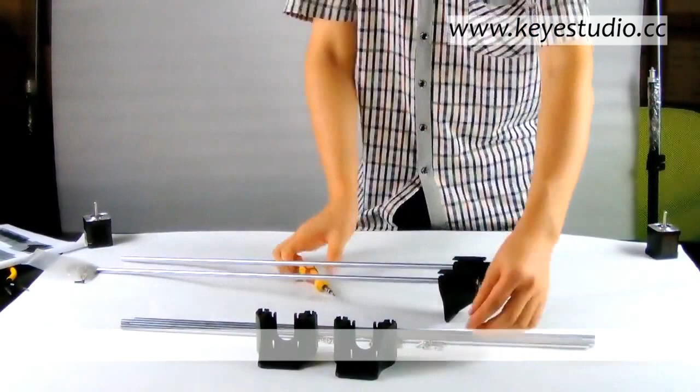Install slider and softly strike the slider into bracket holder with a small hammer. Then screw it down with M3*14 screw. Please mind the pressure you apply, otherwise the bracket holder may be broken due to over-exertion. The direction must not be taken conversely.

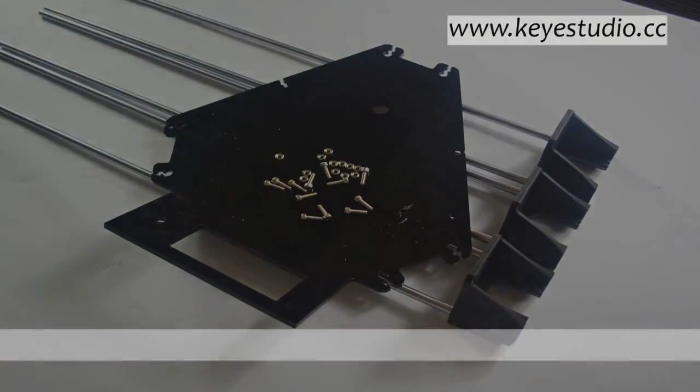The slider and the bottom of the bracket holder must be in one line. Install the bottom fixed plate of the frame and screw it down with screws. Please pay extra attention to the direction of the bottom fixed plate of the frame.

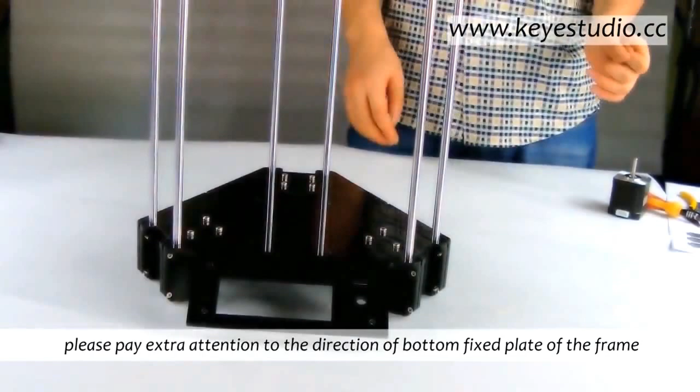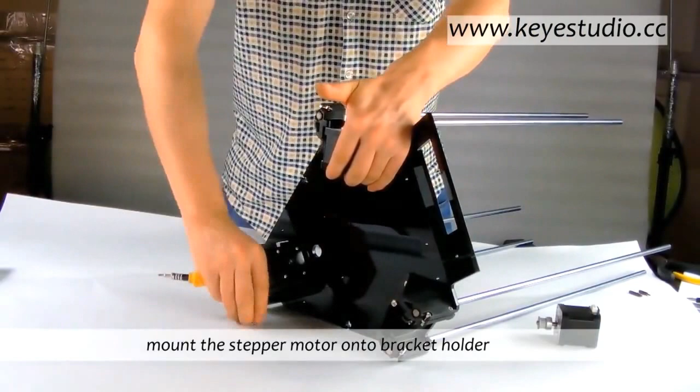Install synchronous wheel. Don't screw it down too tight because it will be readjusted during belt installation later. Mount the stepper motor onto the bracket holder. Please pay extra attention to the direction of motor connection ports for easy connection.

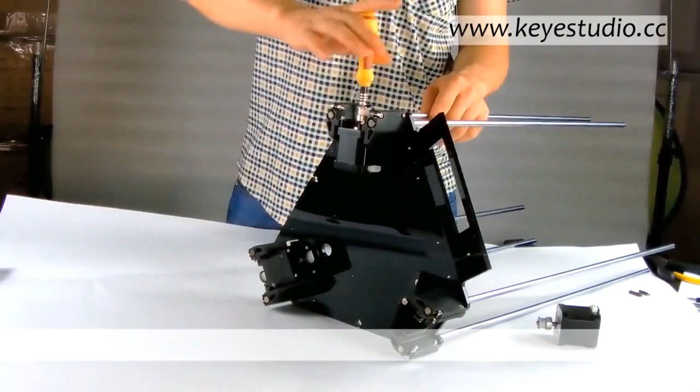Install self-lubricating copper bush and softly strike it into the slider. The side with chamfer should face down. Install belt clip and copper pillar, then screw down with M3*30 and M3*25 screws. Please pay extra attention to the direction of the belt clip during installation.

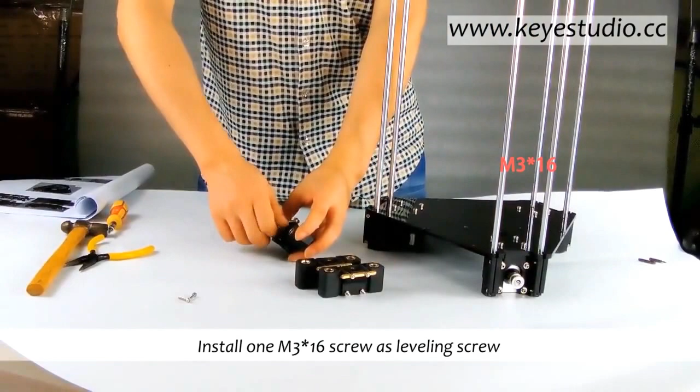Install one M3*16 screw as the leveling screw. Let the side with the leveling screw face up and put the slider into it. The side with the belt clip faces the outside of the frame.

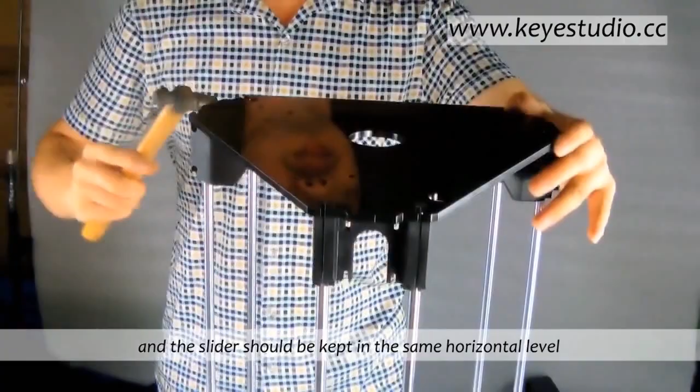Install bracket holder onto the slider. Install the top bracket fixed plate onto the bracket holder. The top bracket fixed plate and the slider should be kept in the same horizontal level. Respectively screw down with M4*14 and M3*14 screws.

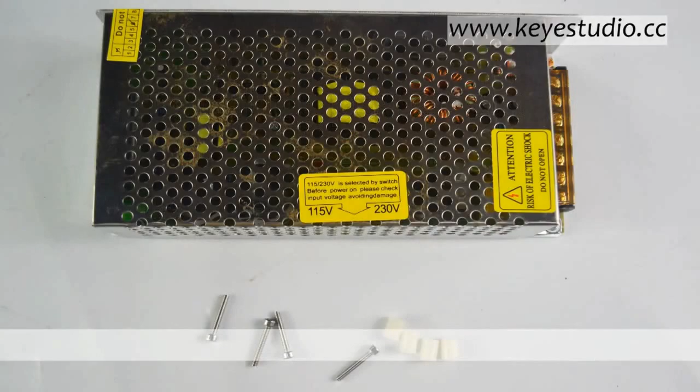Install the power supply onto the top bracket fixed plate and screw it down.

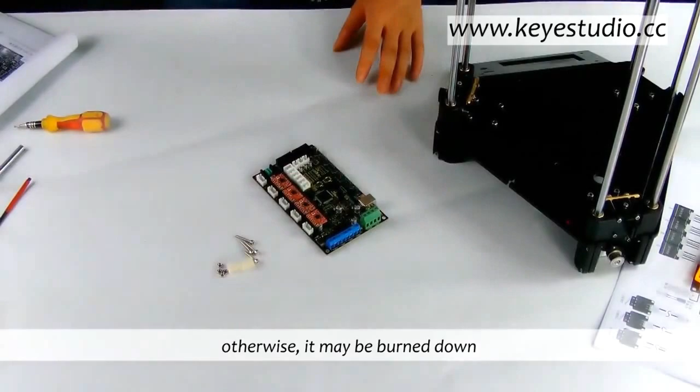Install 4988 drive board onto the 3D V1.2 main control board. Please make sure the 4988 drive is installed in the correct direction, otherwise it may be burnt down.

Install the main board onto the bottom bracket fixed plate. Add a plastic column between the 3D V1.2 board and the bottom bracket fixed plate, then screw it down.

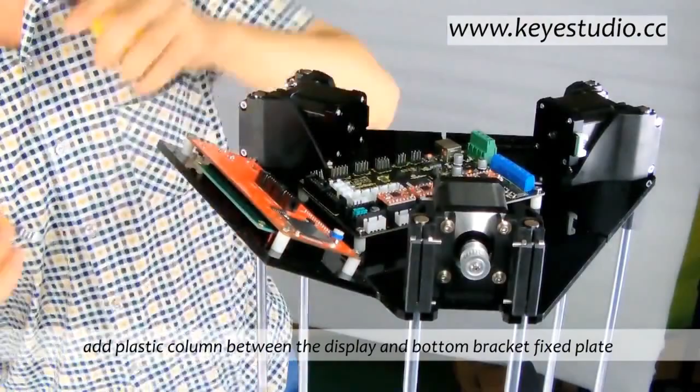Install the display. Add a plastic column between the display and the bottom bracket fixed plate, then screw it down.

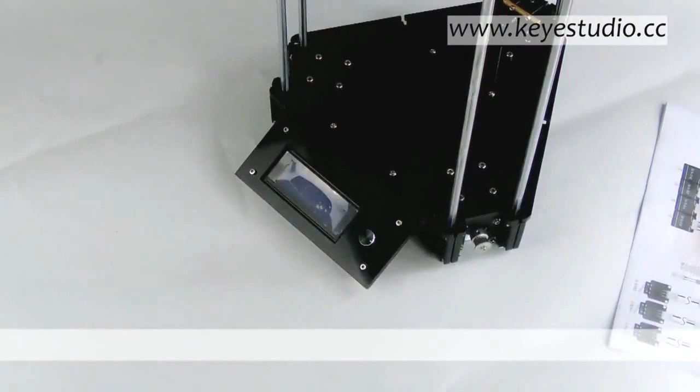Screw the 45 mm copper pillar down with an M3/8 screw.

Install the nozzle onto the movable platform. Let the heating wire and temperature-sensitive wire pass through the movable platform.

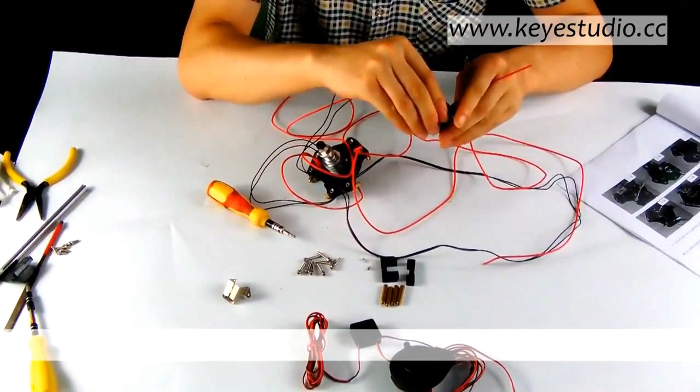Fix the nozzle and air deflecting block of the air blower, then screw it down with an M3/16 screw. Please note that the air deflecting block of the air blower should not be connected with the heating aluminum block of the nozzle.

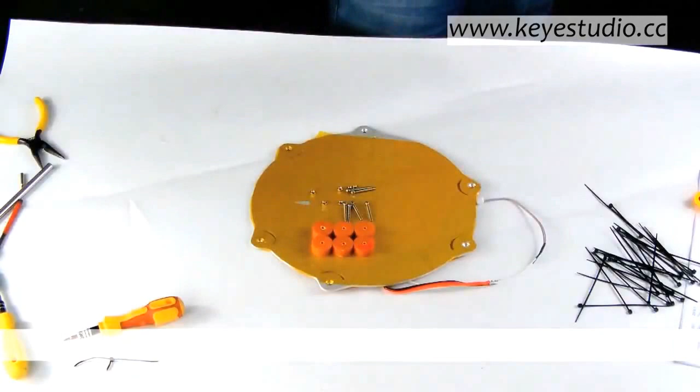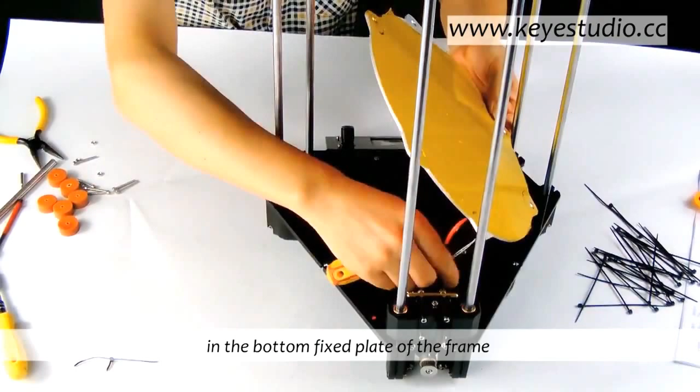Before fixing the hotbed, place the lead temperature-sensitive wire and heating wire through the hole in the bottom fixed plate of the frame. Screw the hotbed down onto the bottom bracket fixed plate.

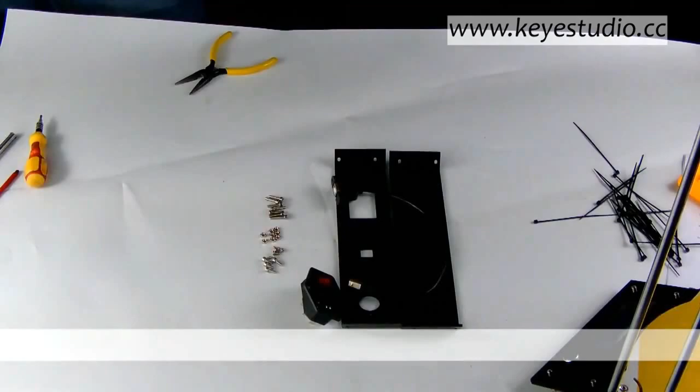Fix the power socket and USB extension cord with an M3/8 screw.

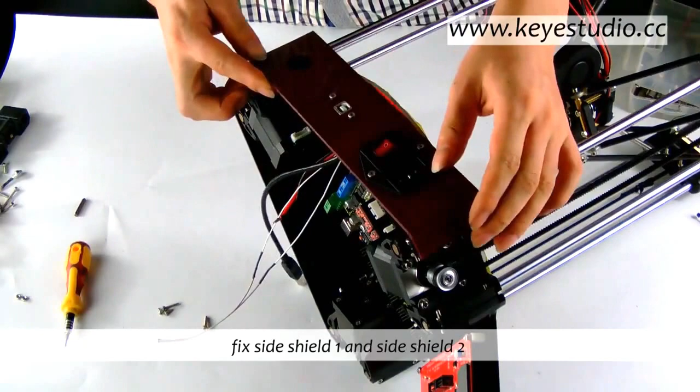Fix side shield 1 and side shield 2, then screw them down. Please make sure the side shields are installed in the correct direction.

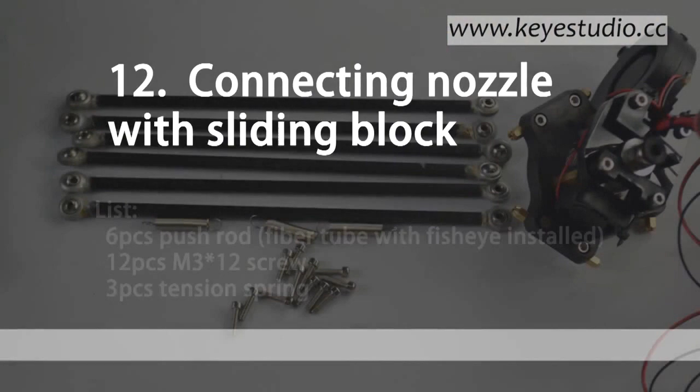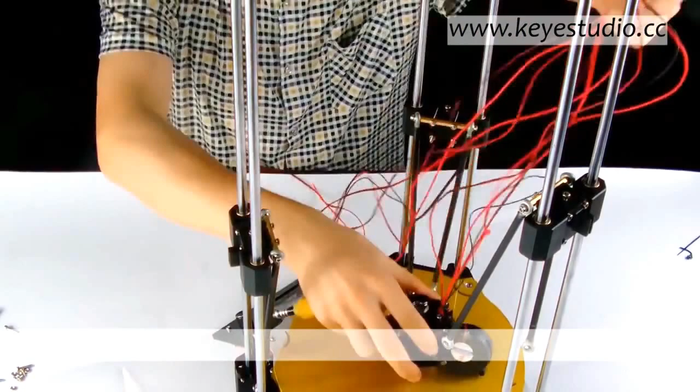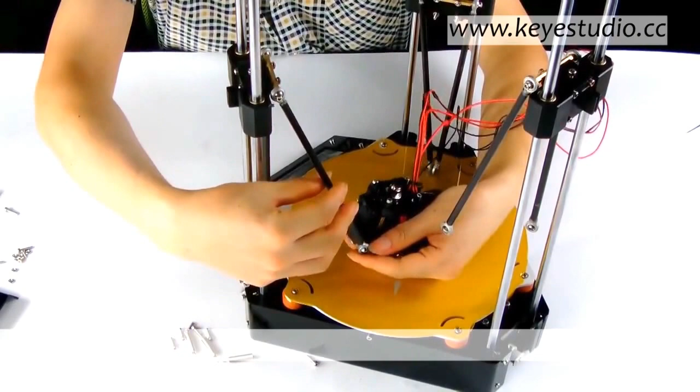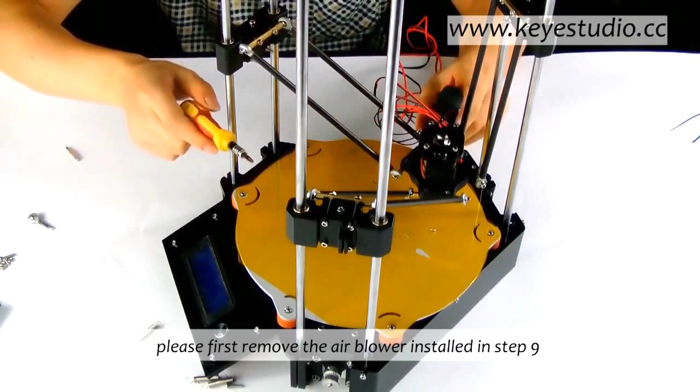Fix the push rod onto the slider and nozzle with an M3/12 screw. Please first remove the air blower installed, then fix the push rod. Finally, fix the air blower again.

Fixed with nylon ribbon and M25 self-tapping screw. Add a tension spring onto 2 adjacent push rods.

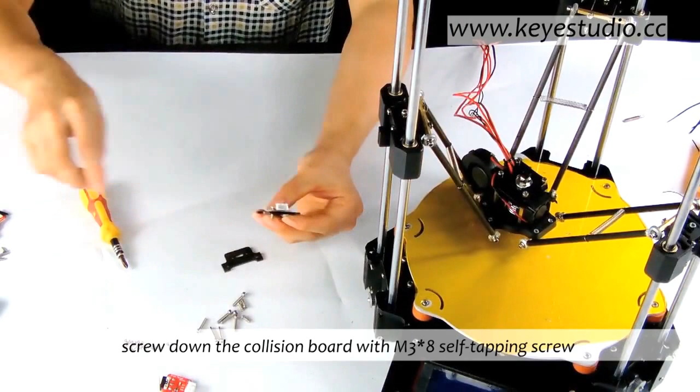Screw down the collision board with an M3*8 self-tapping screw. Install the collision fixed board onto the top fixed bracket with an M3*16 screw.

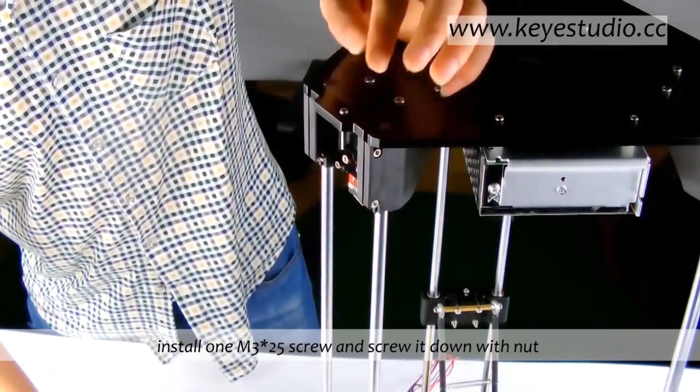Install the flange bearing. Install one M3*25 screw and screw it down with a nut. Please note that the mounting hole should be on the right-side bore.

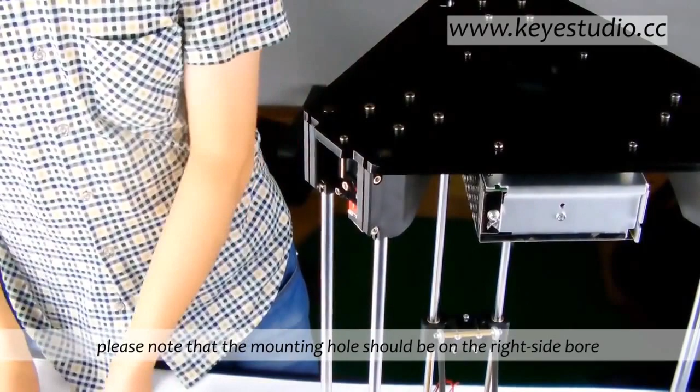When the belt regulator is mounted with the flange bearing, fix the belt regulator onto the frame. Fix the synchronous belt. If the synchronous belt is a little loose after installation, you can adjust the screw on the left to regulate it.

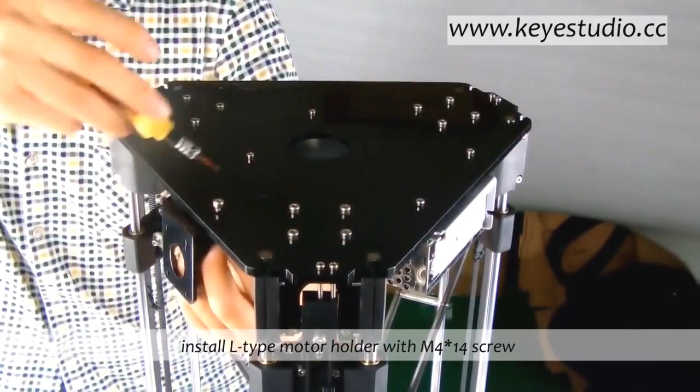Install the extruder gear. Please pay attention to the position of the extruder gear and V-type bearing. Then fix the upper part of the extruder with an M3*20 screw.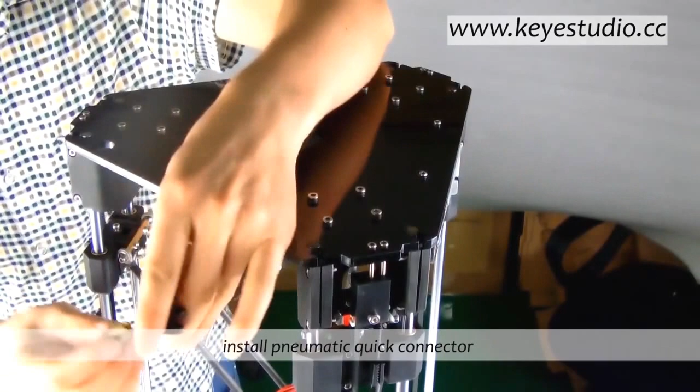Install the pneumatic quick connector, then install the V-type bearing with an M3*14 screw. Install the hex nut and spring. Finish the final installation.

Install the material rack.

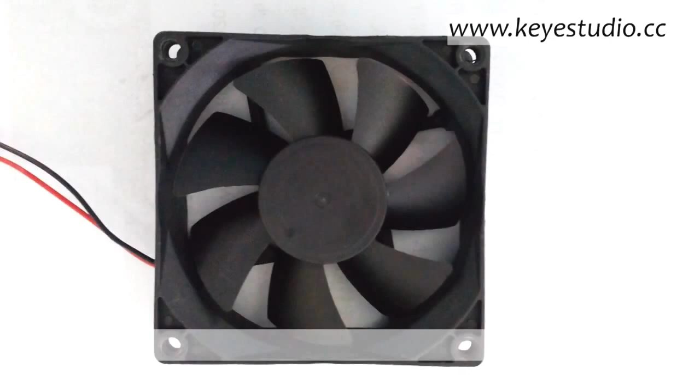Install the cooling fan to the power supply and fix it with a ribbon.

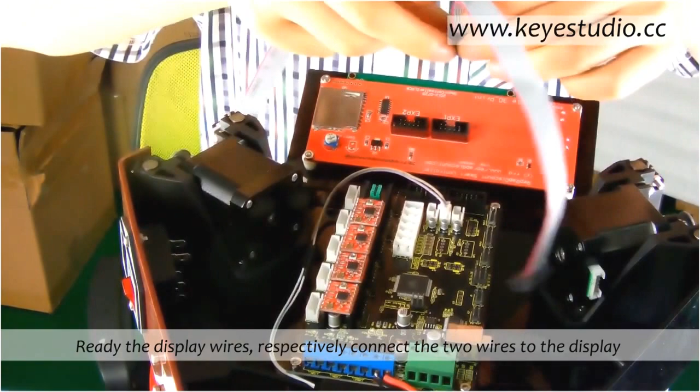Following is the wiring demonstration of the display. Ready the display wires. Respectively connect the two wires to the display and the corresponding EXP1, EXP2 interface of the mainboard.

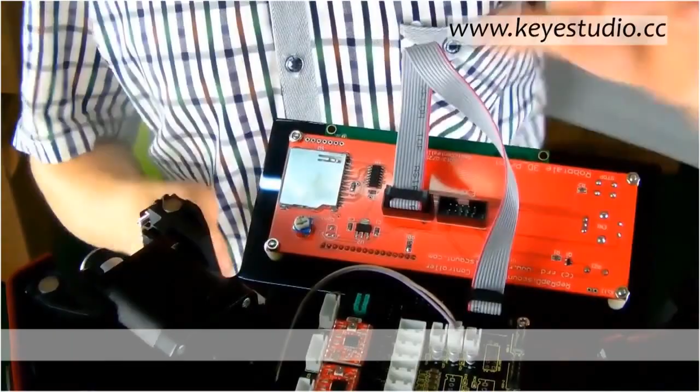Next is the wiring demonstration of motors on the XYZ axis and the extruder. Ready the motor's wires. Connect the 6P interface to the motor interface of the Z axis, and the 4P interface to the corresponding Z interface on the mainboard.

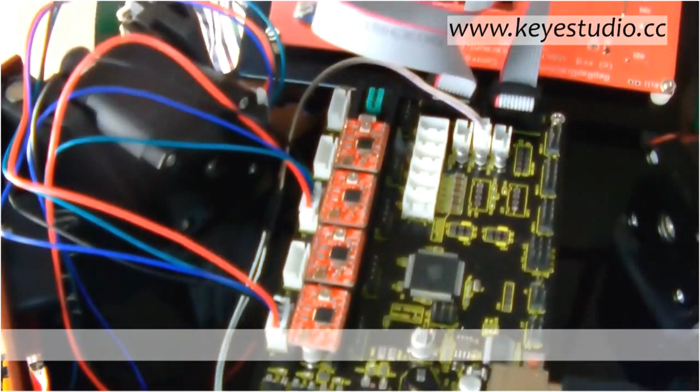Connect the motors on the X and Y axis as well according to the demonstration. Finally, connect the 4P interface of the wire to the E0 interface of the mainboard.

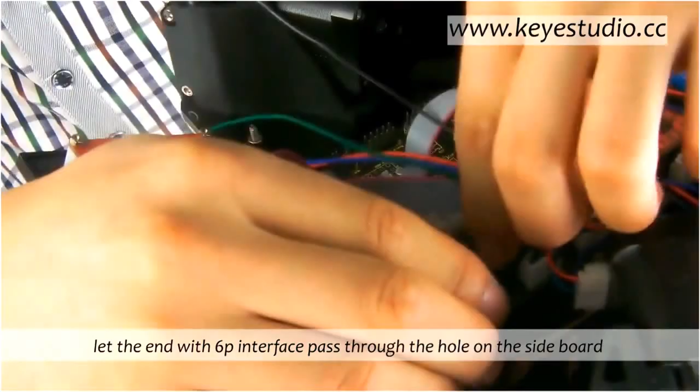Let the end with the 6P interface pass through the hole on the sideboard and connect it to the motor interface of the extruder, completing the connection of 4 motors to the mainboard.

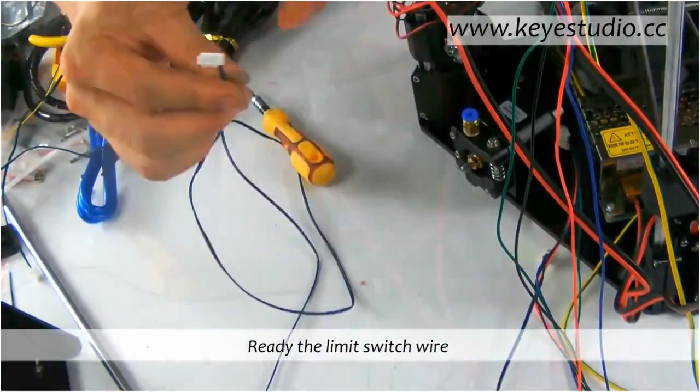Following is the wiring demonstration of the limit switch. Ready the limit switch wire. Connect the black and blue wire to the limit switch of the X-axis and the J12 interface of the mainboard according to the demonstration. Pay attention to connection direction.

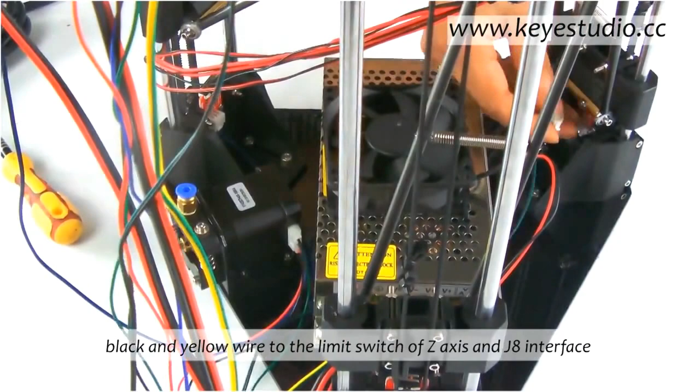Connect the black and green wire to the limit switch of the Y-axis and J10 interface. Connect the black and yellow wire to the limit switch of the Z-axis and J8 interface. Note that the limit switch on the same slider must correspond with the motor interface, otherwise the limit switch or even the whole structure may be damaged during debugging.

Next is the wiring demonstration of the cooling fan. Find the power line of the fan. Let it pass through the hole on the sideboard and connect it to the fan interface of the mainboard. Note that black line connects to negative, red line to positive.

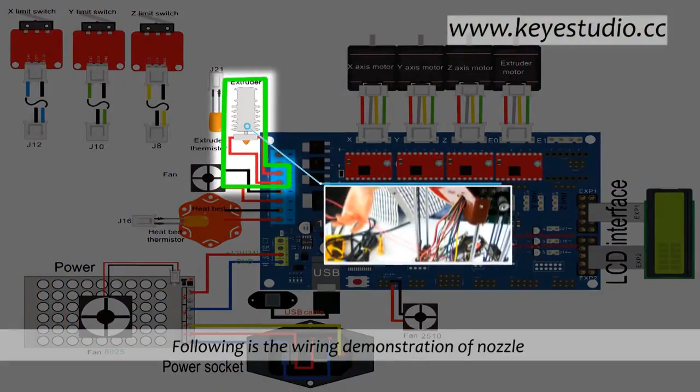Following is the wiring demonstration of nozzle. Find the power line of the nozzle, let it pass through the hole on the sideboard and connect it to the HE0 interface of the mainboard next to the fan interface. No positive or negative difference.

Now, wiring demonstration of temperature-sensitive resistance of nozzle. Find the power line of the resistance, let it pass through the hole on the sideboard and connect it to the J21 interface of the mainboard.

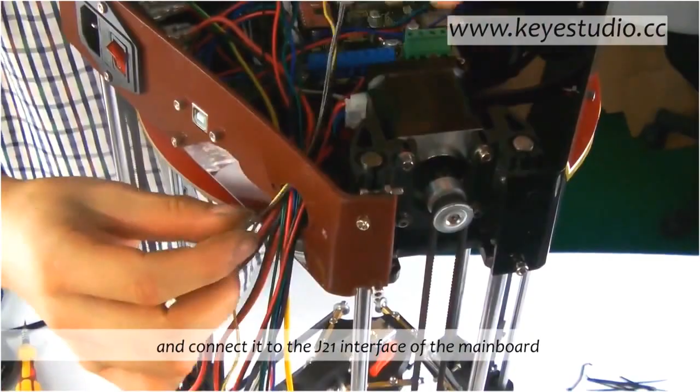Following is the wiring demonstration of nozzle cooling fan. Find the power line of the fan. Let it pass through the hole on the sideboard and connect it to the J17 interface of the mainboard.

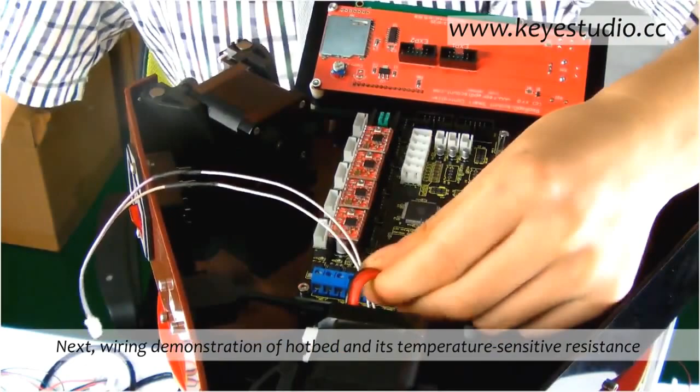Next, wiring demonstration of hotbed and its temperature-sensitive resistance. Find the power line of the hotbed. Connect it to the J16 interface of the mainboard. Black for negative, red for positive.

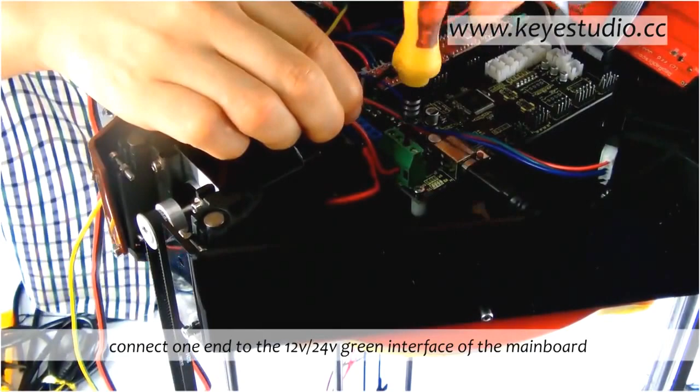Following is the wiring demonstration of power supply. Find the red and black line. Connect one end to the 12-volt or 24-volt green interface of the mainboard. Pay attention to negative and positive. Let the other end pass through the hole on the sideboard. Connect to V positive and V negative interface. Pay attention to negative and positive.

Next, wiring demonstration of USB extension cord. Find the USB extension cord and connect it to mainboard.

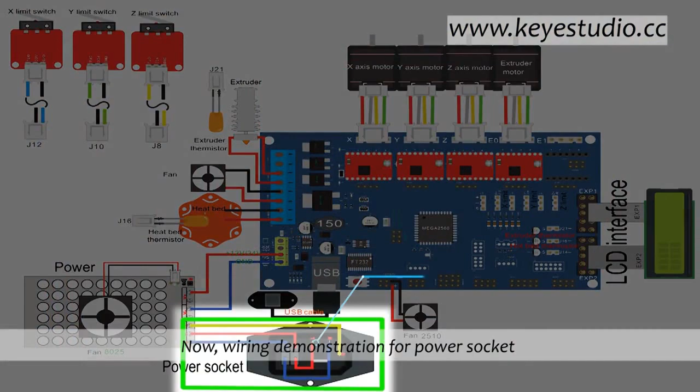Now, wiring demonstration for power socket. Find the short black and red wire. Connect them according to the demonstration.

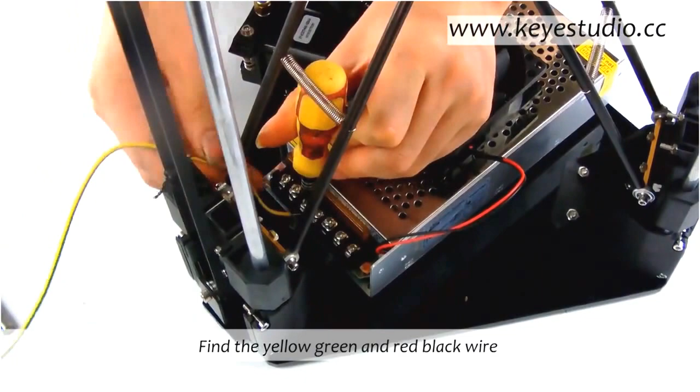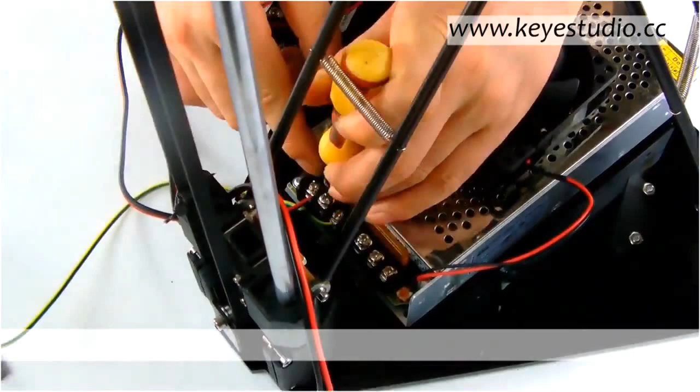Find the yellow, green, and red black wire. One end connect to the L, N, and ground of the power supply according to the demonstration. Let the other end pass through the hole on the sideboard and connect it to the power socket.

Tightly insert the feeding tube to the nozzle. Use the winding pipe to wind the wires.

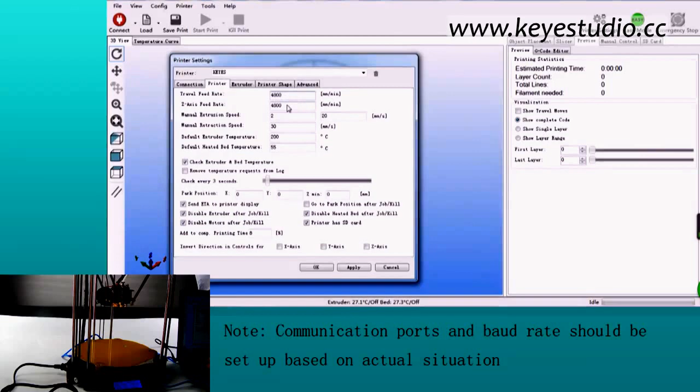Open Repetier Host, then select Configuration, Printer Settings to set up the printer. Note that communication ports and baud rate should be set up based on actual situation. Initial position should be set up accordingly. Printer radius and printable height should also be set up according to actual situation. When you finish the setup, click OK.

Now click Easy Mode, hide filament and display toggle log. Click Connect button to connect the printer. Separately test the blower, hotbed, and extrusion head to see if they are working correctly.

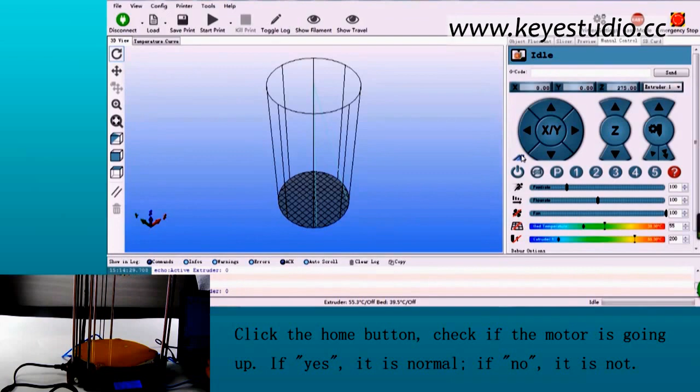Click the Home button. Check if the motor is going up. If yes, it is normal. If no, it is not.

Next, let's set up the script code. Select Preview, G-code Edit, Script, Edit script 1, 2, 3, and 4. Save after the codes are set.

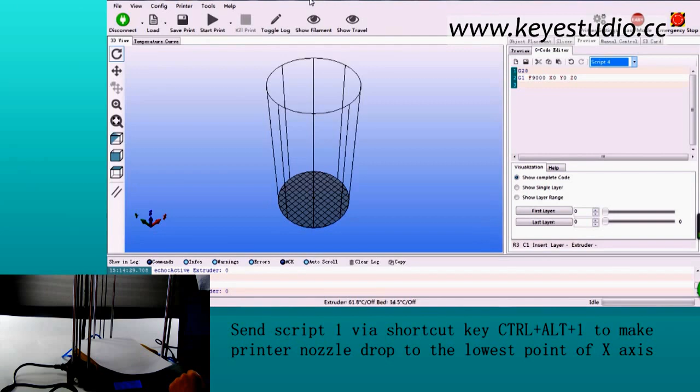When you are locating the lowest point, please check the distance from nozzle to hotbed in case the nozzle will damage it. Send script 1 via shortcut key Ctrl-Alternate-1 to make printer nozzle drop to the lowest point of x-axis. When the dropping process is finished, observe the distance between nozzle and glass panel.

Then send script 2 and script 3 commands as well, and observe the distance between nozzle and glass panel and locate the lowest axis.

Compare X, Y, and Z axis. You can see the lowest one is the Z axis. If the distance between the lowest point of the Z-axis and the hotbed is too wide, adjust the leveling screw. Twist clockwise for nozzle going up, anti-clockwise for going down.

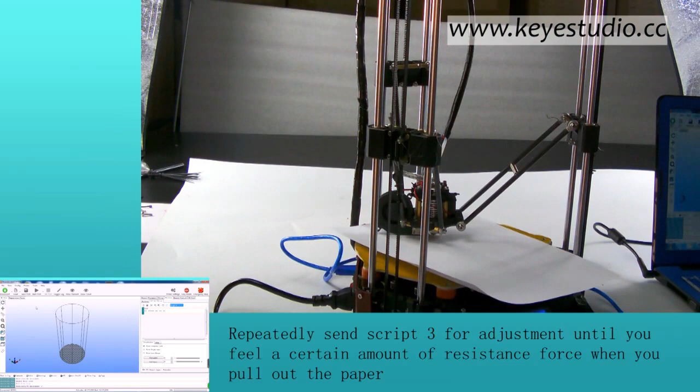Repeatedly send script 3 for adjustment until you feel a certain amount of resistance force when you pull out the paper. The distance is about the thickness of a piece of A4 paper.

After Z-axis is adjusted, send script 1 and 2 to adjust the X and Y axis with the same method above.

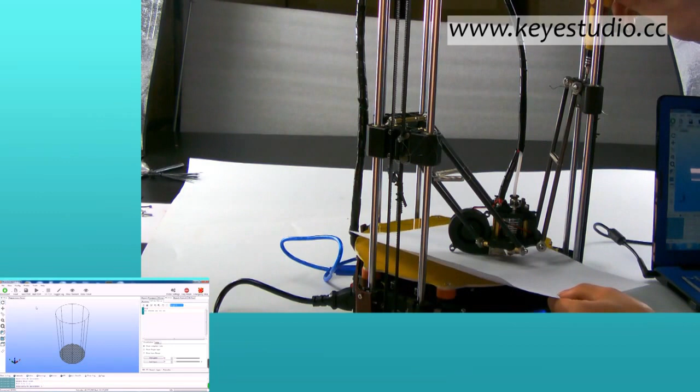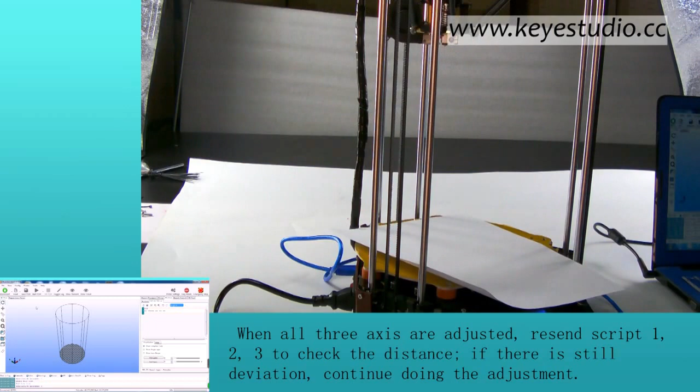When all three axes are adjusted, resend script 1, 2, 3 to check the distance. If there is still deviation, continue doing the adjustment.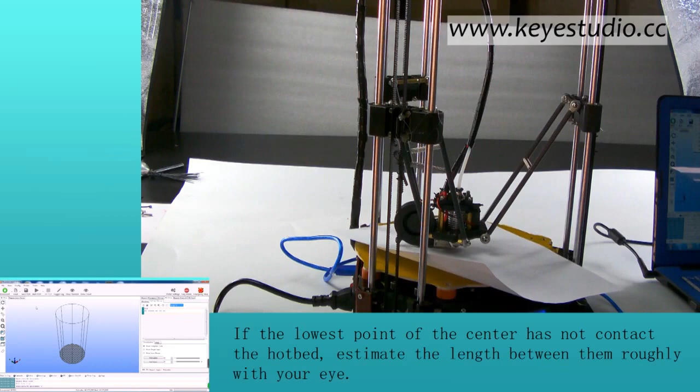After the lowest points of three axes are well adjusted, send script 4. If the lowest point of the center has not contacted the hotbed, estimate the length between them with your eye.

Open firmware, modify the numerical value with 1, adding your estimated length to the original. After changing the firmware, update it to the printer mainboard. When you do the update, please disconnect the connection between the printer and Repetier Host.

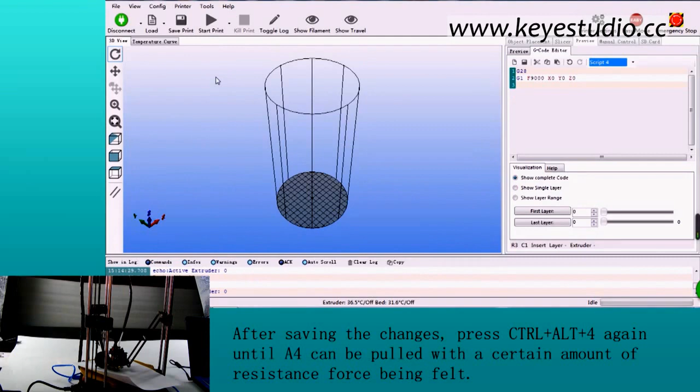If the paper is pressed down by nozzle and can't be moved at all, you can change the value of Z to a negative number, such as Z negative 0.5 in firmware setup. After saving the changes, press Ctrl Alternate 4 again until A4 can be pulled with a certain amount of resistance force being felt.